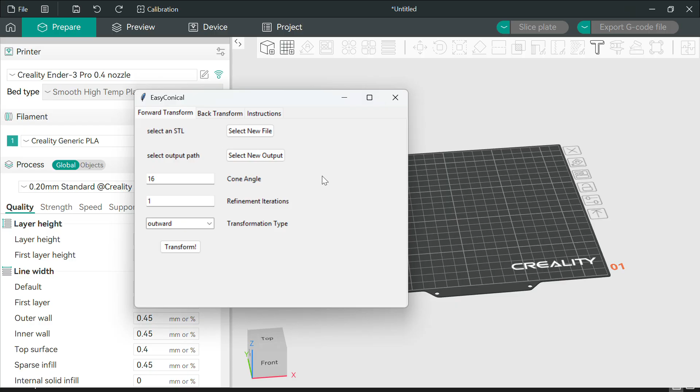Hello and welcome everybody. In this tutorial, we're going to go over how to use EasyConical to 3D print overhangs without supports. Now, the first step doesn't even involve EasyConical, it involves the slicer that you're going to be using alongside it. Make sure you have a slicer that is compatible with your printer.

I've chosen Orca Slicer just because of a bunch of features that make this process easier. So you're going to need to calibrate your settings specifically for EasyConical's process.

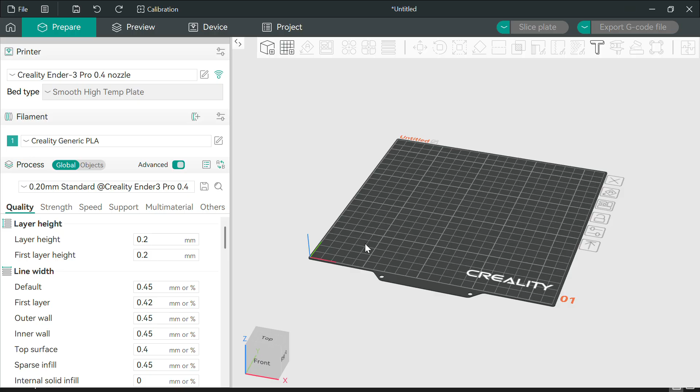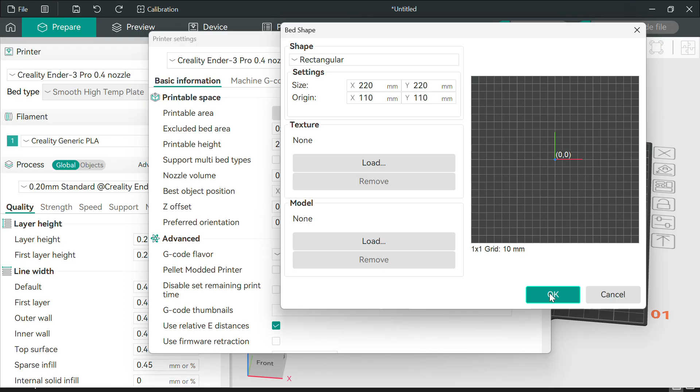The first step for that is making sure the origin is not in the bottom left corner, but is actually in the center of the print bed. So if you go into wherever that settings is, you can just make it half the size. If the X origin is half the X size and Y origin is half the Y size, that will set it exactly on center. You also want to make sure that use relative E distances is available and on.

If your slicer is not compatible with relative E distances, unfortunately, you do have to use another software as there is no way around having to use this.

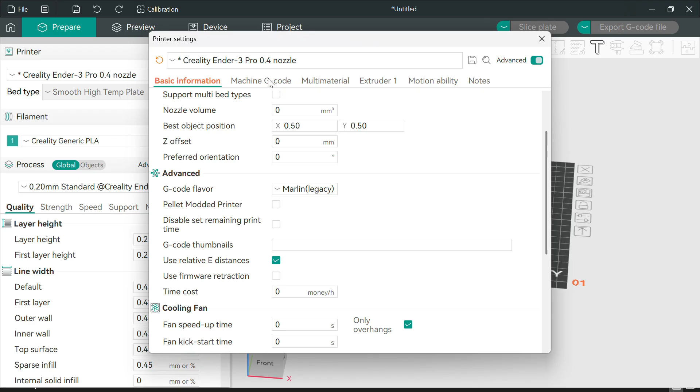You also want to, in Machine G code or any other settings where this might be, get rid of any priming lines. You'll see here that this whole section is for nozzle priming. The way that works is it makes extra lines that will mess up the process. So you want to get rid of all of that. You don't want any nozzle priming, no startup lines, none of that.

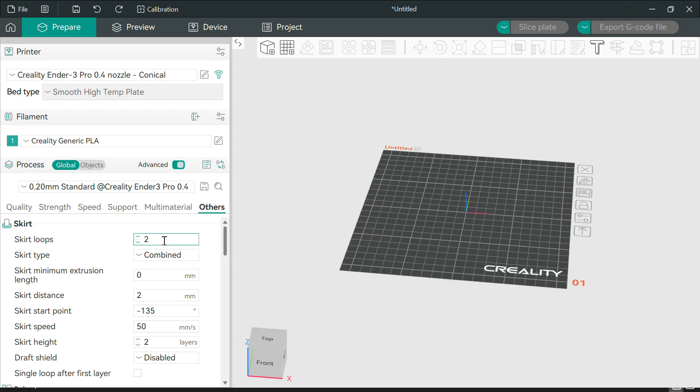So save this as something you can reference later, and once you have that saved, there's also some regular settings that you will want to have. Of course, supports should be off, and you will want to have no skirt and no brim, and also no raft, though rafts are usually disabled by default.

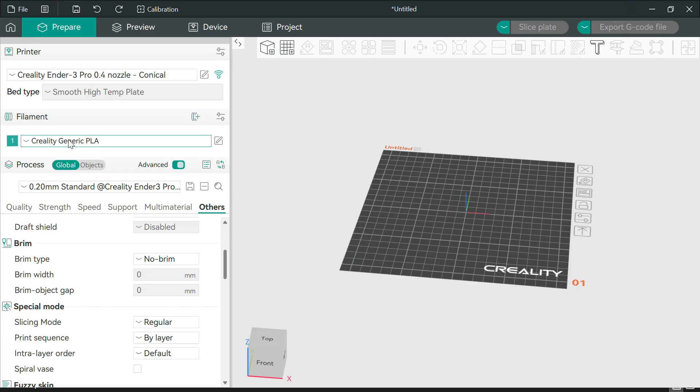So once you have that, save. And now, once you have these, it's time to insert the actual model. So you add the model, and in this case, I'm using the test pipe.

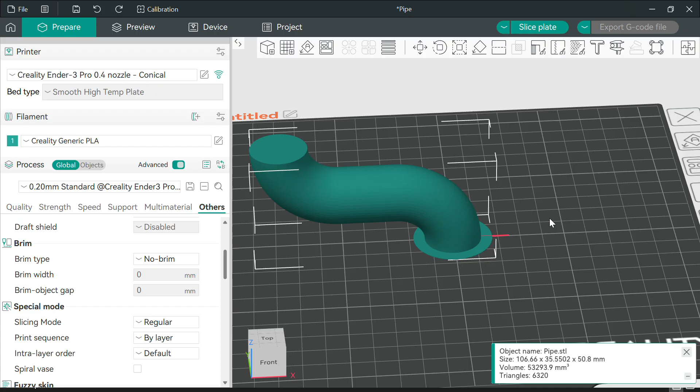Now, the way to do a piece with an external overhang like this is to have the center of the first layer on the origin, which is now at the center because it's going to branch outwards. So set that roughly on center. It doesn't exactly matter if it is perfectly on center, but it should be roughly there because the entire model is going to get skewed around this axis here, and that should be on the first layer.

So, if your slicer is based in Prusa Slicer, you will need to do an extra step. If your slicer isn't based there, you can export this file because you need the bed settings where it is on center. So export all objects as one STL, even though there's a single object, you can export that.

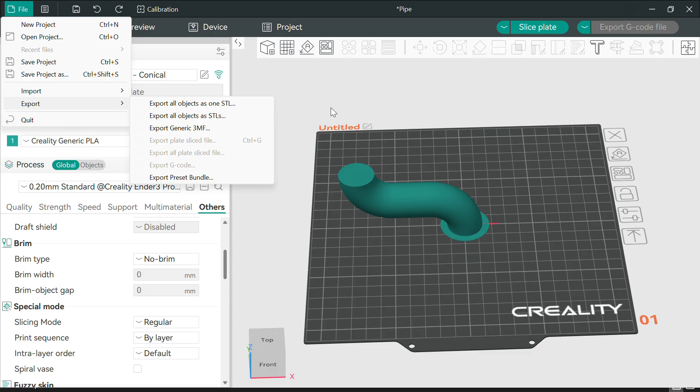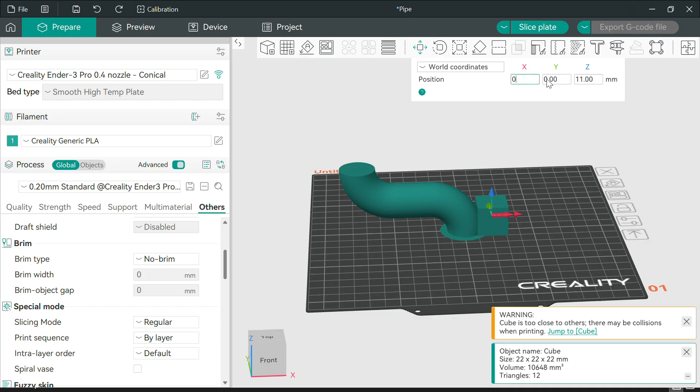If it is based on Prusa Slicer, the extra step you need to do is to add a flat rectangle that is the size of the build plate before you export it. Fortunately, Orca Slicer has an easy way to do this. It lets you just make regular shapes. Other slicers, you may have to import a shape because they probably will not have this feature.

Once it's in, it should look like this, a flat plate the size of the build bed, with your part in the center. Now, this can be exported as a single STL, and we'll call it pipe plate.

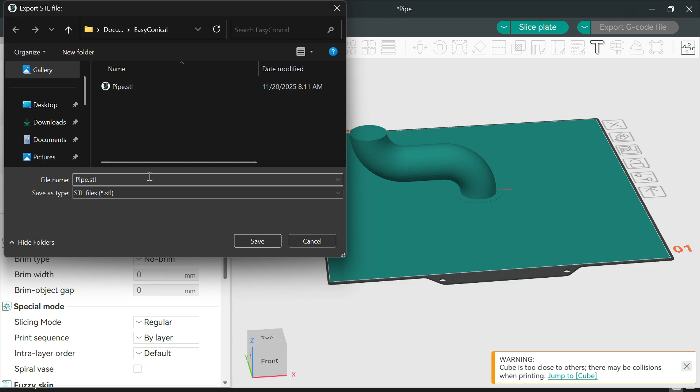And now, once that is exported, you may get warnings that the pieces are intersected. That doesn't matter. You can ignore that.

Now, open up EasyConical. Make sure you are in the Forward Transform tab, and you're going to select an STL, the one that you just exported, so pipe with a plate.

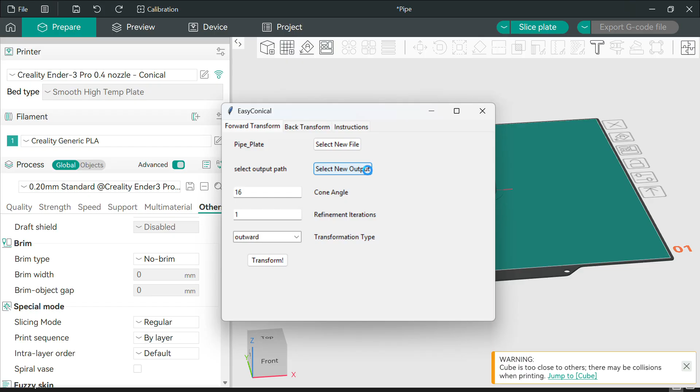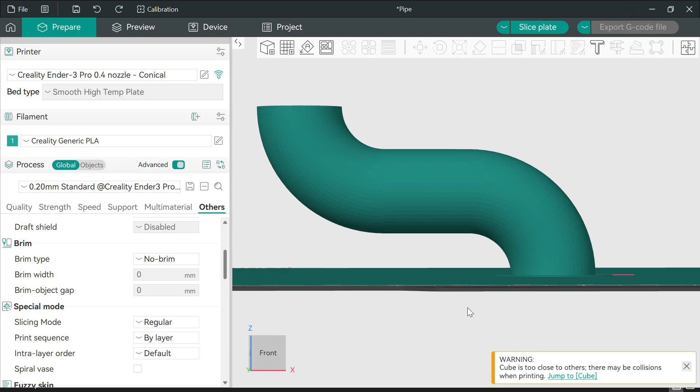Output path is where you want this first file to be exported to, and cone angle is the angle this is going to get skewed by, the angle that in the end the lines are going to be in. The way conical slicing works is it is printed outwards like that at an angle. Each layer is kind of at a diagonal. The 16 means that it will be at 16 degrees. Make sure you pick something that your nozzle on your machine has clearance for. 16 is an okay number generally.

Refinement iterations is how many refinements the mesh goes through. 1 or 2 is usually fine for most models. And transformation type, this has an outward

overhang, because the overhang's on the outside and it's starting from the center and printing out, so you select outwards. If instead you were making a bridge structure with the overhang in the center and ground pieces on the outside, the top of that bridge would be on the origin axis, and you would select inward. But right now for this piece, we are going to do outward.

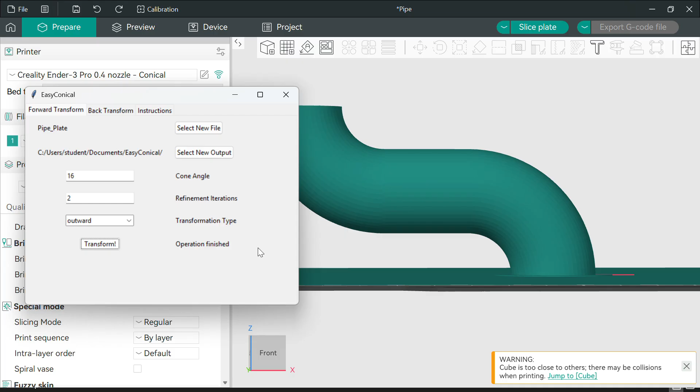So once all of your settings are in place the way you want them to be, you're going to click the transform button and wait for a little pop-up to show you that the operation has finished. So now that that's done, we can go back into the slicer. You can get rid of both of these, we don't need those anymore. And we're going to add the model.

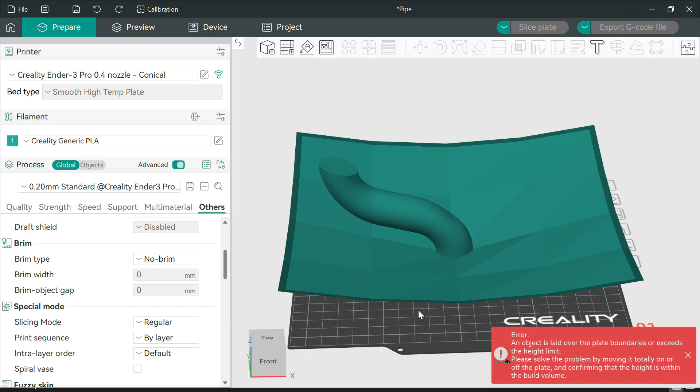We can see the pipe plate outward 16 degrees. We're going to open that in here, and everything has been skewed at an angle of 16 degrees from the origin. So if you did the workaround, this plate will be here. If you didn't do the workaround, you will only have the model there.

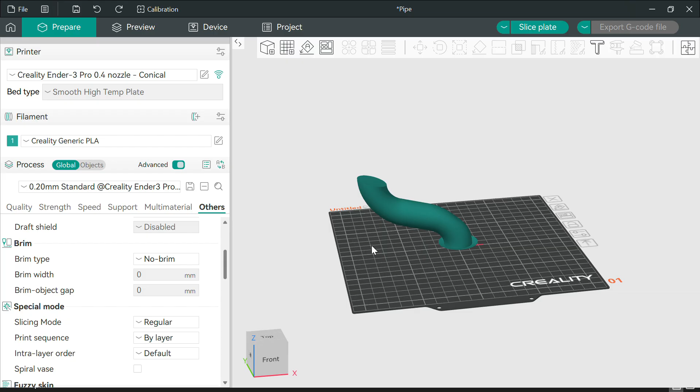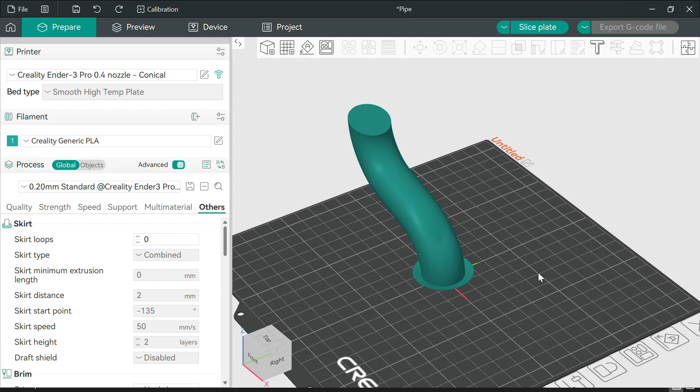What you're going to do: most slicers will have a split option, so you're going to split to objects and remove the plate. Now, whether or not you have done the Prusa slicer workaround, you should be in the same spot. This piece should be here, and now you want to make sure your slicer settings are checked: no skirts, no brims, no rafts, no supports, no extra little priming lines, because those will mess everything up. So now you can slice.

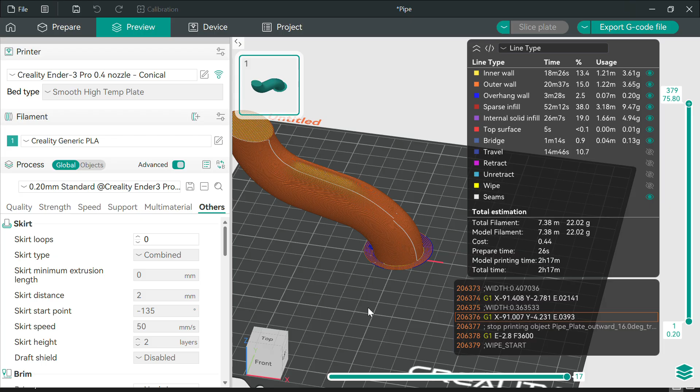You can see here I don't have any extra little lines and stuff, because those would, in the back transformation, get skewed in the wrong direction and mess things up, which would not be good for any of this process. So make sure there's no additional lines, and once you're satisfied that it's good, we can export this G-code file. We're going to call it pipe

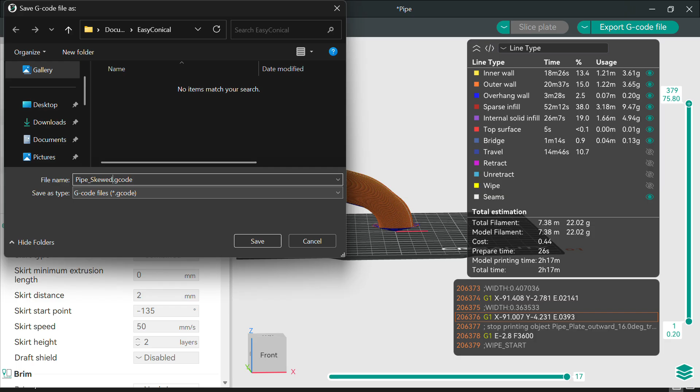skewed. And now you can open up EasyConical for the second time, go to the Back Transform tab, and we're going to select the recently exported G-code, so pipe skewed, and the output path can be the same or wherever you want it to go.

Now, these first two settings, cone angle and cone type, should match cone angle and transformation type. So we've done an outward transformation at 16 degrees, so it should be outward 16. If you have done something else, this should match that something else that you've done.

First layer height, just in case your slicer or some glitch with the system moves it up or down in some weird way, allows you to manually correct that error and shift it down or up.

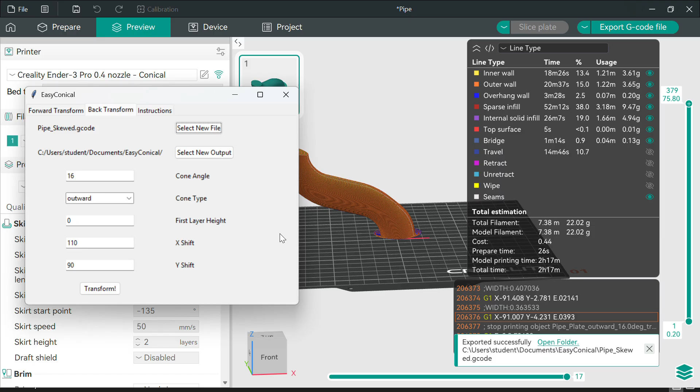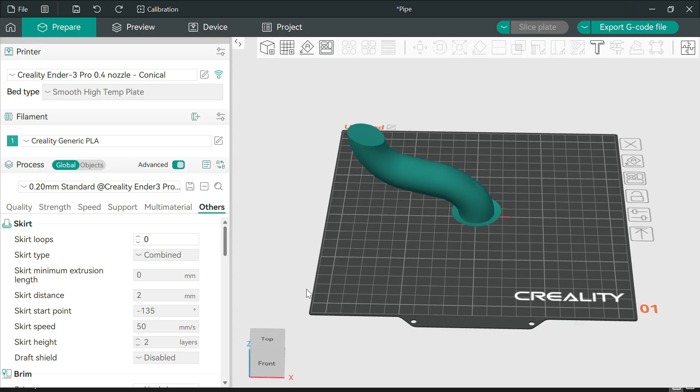X shift and Y shift serve a similar function for moving the part in X and Y, because the printer will try to print your part exactly where it is. So even though the slicer thinks that the origin is here in the center, your printer will think the origin is back in the corner. Therefore, it will try to print the part over in the corner.

So what we do is put an X shift and Y shift in, which moves the part over so that when the origin is shifted over by the machine, the part is also shifted over and it is printed in the center of the build plate. So again, that should be set to your origin point or half the build plate, so 110, 110 in this case. And then you hit transform.

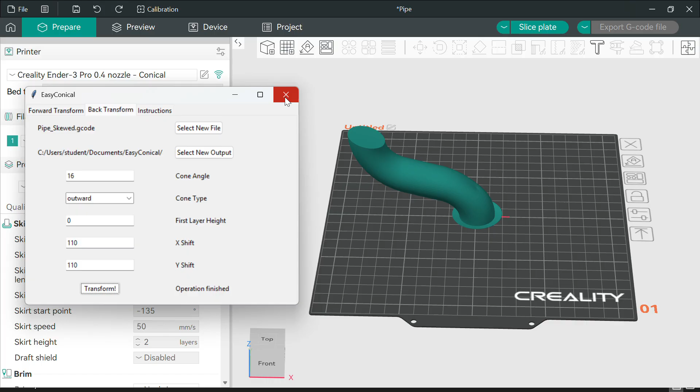Okay, and you can see now that it says operation finished, and it is done. So now you can close out of EasyConical, you don't need to be using it anymore. In fact, the entire process is almost finished.

So in here we'll see pipe skewed, back transform outward. And now this, you can view in whichever G-code viewer you like. OrcaSlicer has a built-in one, so we're going to show the results there. This process also takes a bit of time just loading in, so I'm going to again skip ahead.

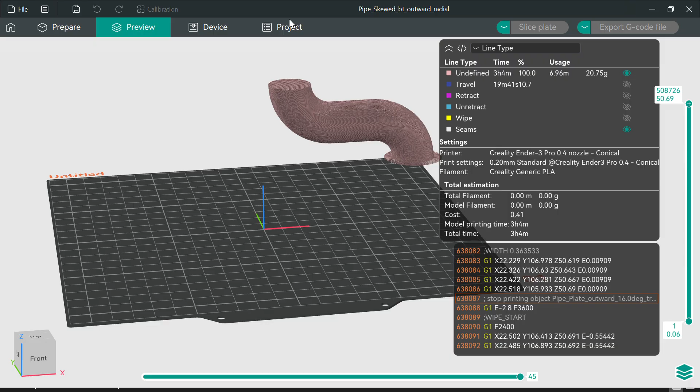Okay, now we're in OrcaSlicer's G-code viewer, and you can see that the part looks from a distance exactly like it did beforehand, except it is shifted away from the origin the exact distance of the X shift and Y shift. Remember that the printer is going to think the origin is over here, which is going to make the part print here. You can use a G-code viewer where the origin is set in the correct spot to actually make sure this will happen.

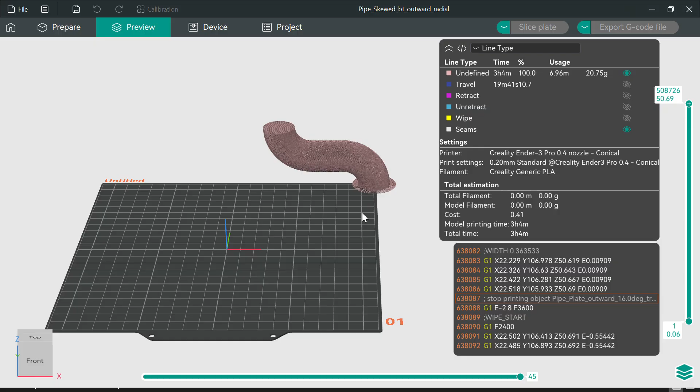And now you can see that the process worked by changing the layer heights in the viewer and seeing that they are at 16 degrees. Again, check that this can clear your nozzle.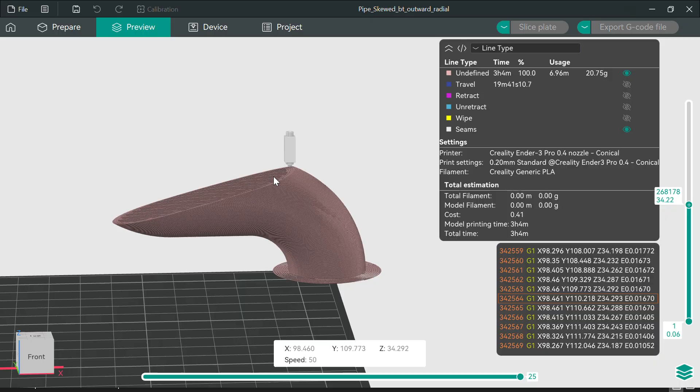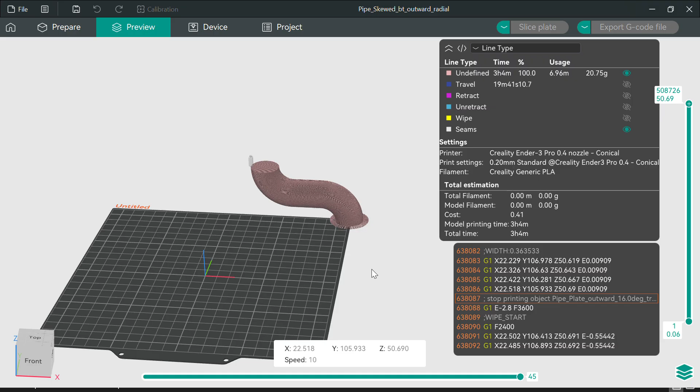And you can watch a preview of how it's going to print without supports. It uses the bottom to bridge out, kind of. If there's any weird irregularities, some fuzzy bits, or it's lifted way off the ground with a giant square under it, that was likely caused by an irregularity in the first file. So you're going to want to look there and make sure there were no extra bits you forgot to get rid of, because those are what likely caused the problem.

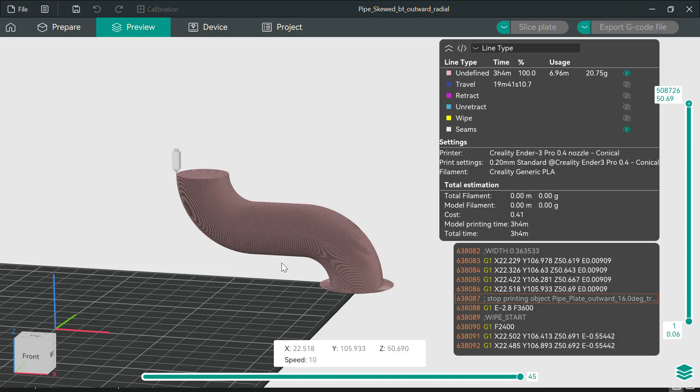So once you're satisfied with the way your file looks, this file that's loaded in here, if it is correct, can then just be taken and put onto the machine and run. And it should go. And that's it.